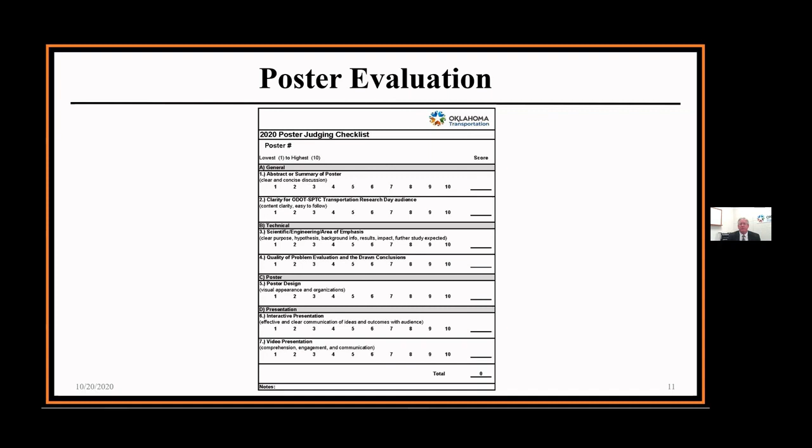Hard to see, I know it's a little small, but I wanted to provide the evaluation form that we use so everybody had a feel of the things we were looking for and what we did there. It helps the contestants, it helps the folks that prepared the posters, and maybe gives others just watching a sense of the things we were looking at and how we judged, to get to where we're going to give out a few awards here in just a bit.

So part of this is for knowledge, and when we have a chance to meet in person, I truly do not have enough time in the day to do what I would really personally like to do. I like to walk around and talk to everybody that puts something out there. There's so much knowledge to be gained and so many things to be learned, but we know there's just not enough time. But we also know we have a lot of good quality work going on in our midst, obviously at our state schools, but obviously our partner schools too. So we're obviously excited, as I said earlier, to have those folks join us.

But we have a competition, and we'd like to recognize those folks that were definitely exceptional. They were all great posters, but we came down to having the competition. So we're going to start with second honorable mention, which goes to the team from Missouri University of Science and Technology, for the repair of corroded steel bridge columns using ultra high performance concrete: an experimental study.

So what we want to do during this phase of the session is I'm going to pull up the videos, and we're going to look at the videos that were recognized by our competition committee.

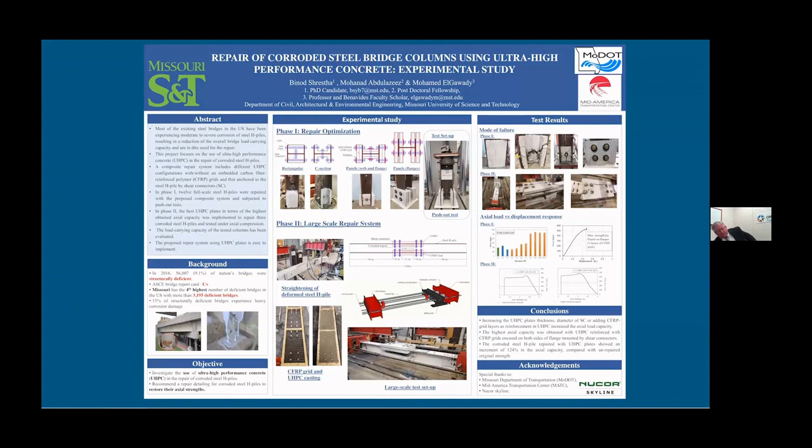So from this, we can recommend UHPC plates as one of the repair systems for corroded steel H-piles.

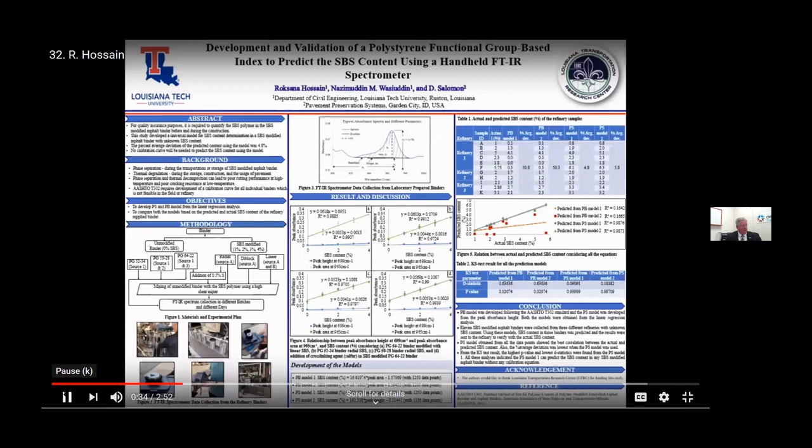AASHTO has a standard for SBS content determination in SBS modified asphalt binder and emulsion, but this standard requires building a calibration curve for each specific binder.

The goal of this study is to develop a polystyrene model using the peak height method at wave number 699, and to develop a polybutadiene model according to the AASHTO standard.

For this purpose, 3 different PG binders from three different sources were collected to mix with 3 different types of SBS polymer from 2 different sources. Sulfur was added in the SBS modified binder as a cross-linking agent.

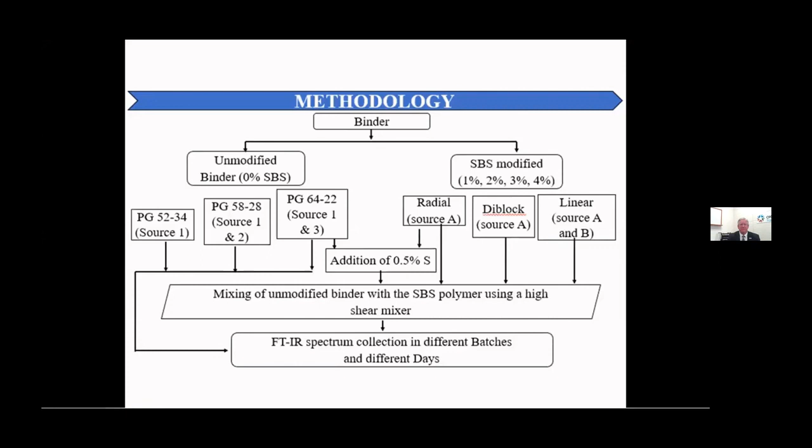SBS polymer was added to the binder in the laboratory using a high shear mixer. The height of the functional group was determined by drawing a baseline considering 2 lowest points on either side of the characteristic functional group.

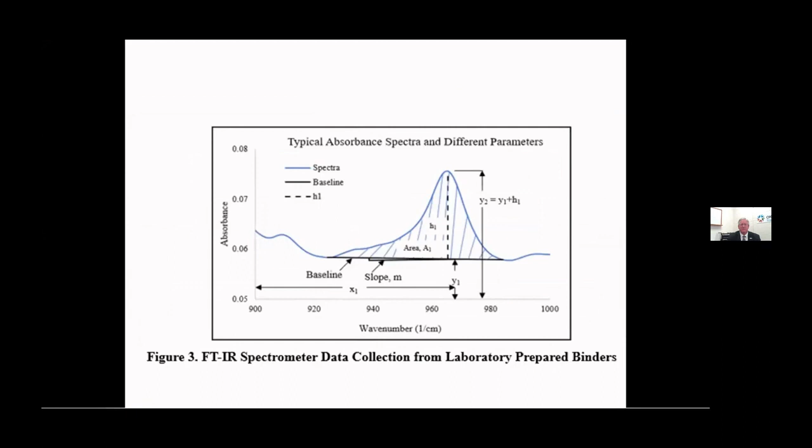After that, the midpoint of the baseline and the top point of the peak were used to determine the peak height. The absorbance area was calculated using the trapezoidal rule model. The baseline was drawn following a similar process as the peak height method.

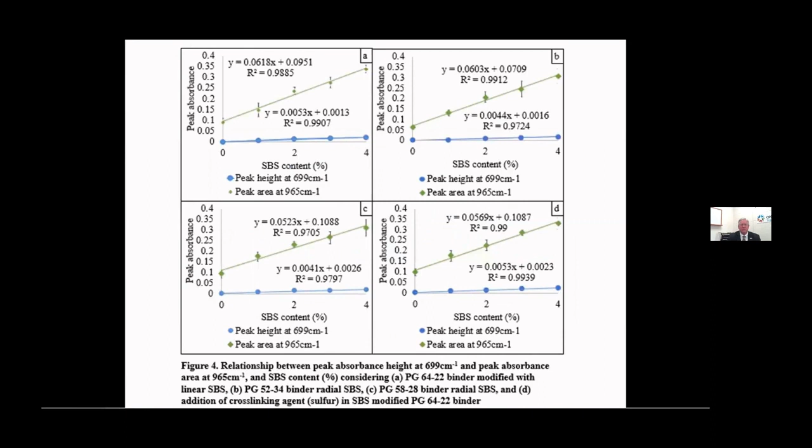It was observed that peak absorbance height and area are linearly correlated with the SBS content. From the linear regression analysis, 4 models were developed considering outlier data points. ANOVA was performed to check the models statistically.

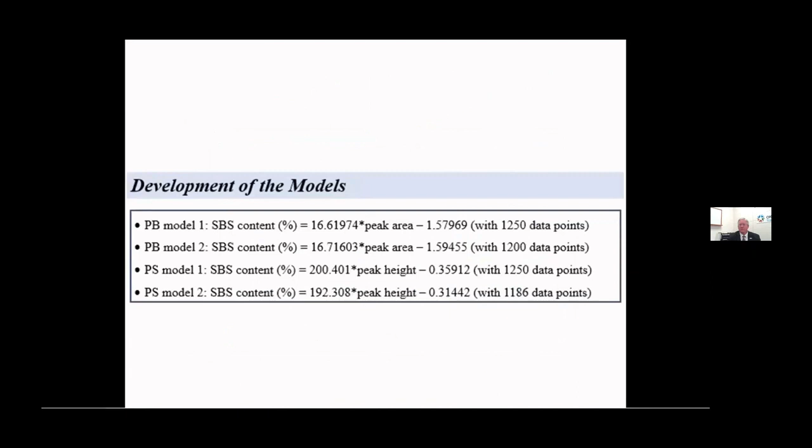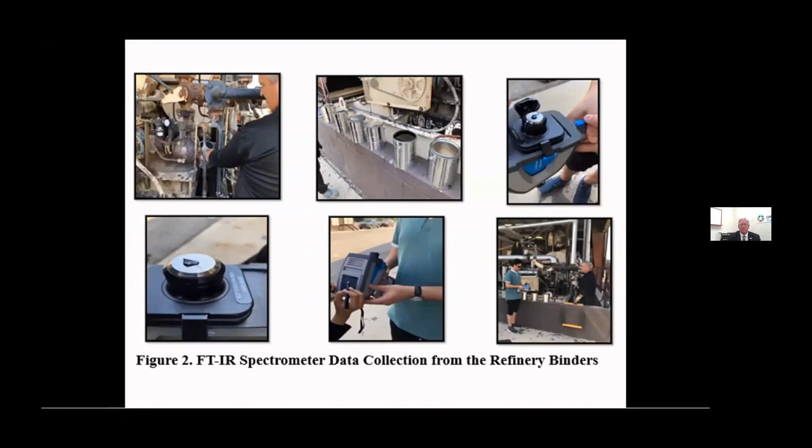To verify the models, 1 refinery was visited and 2 SBS modified binders were collected. Also, 9 SBS modified binders were supplied from 2 different refineries with unknown SBS content. Using the models, SBS content was predicted and verified with the refinery.

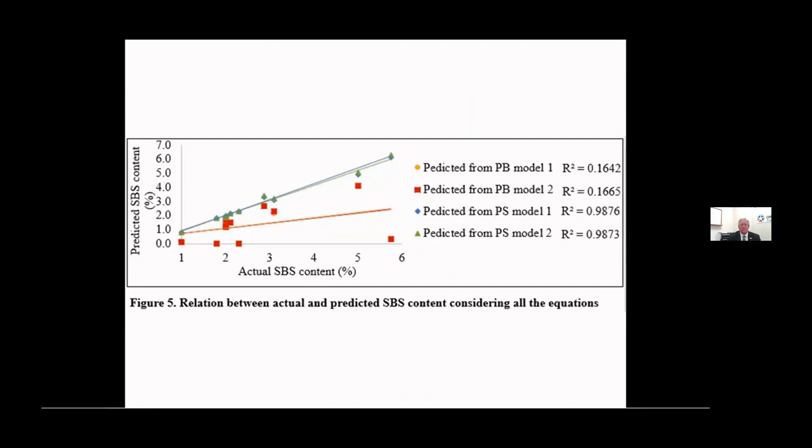It was found that predicted SBS content from the polystyrene model 1 has the highest correlation with the actual SBS content. From the KS test, the lowest d-value and highest p-value were obtained from the predicted result using polystyrene model 1. Finally, it can be concluded that the developed polystyrene model can be used to successfully predict SBS content without any calibration curve.

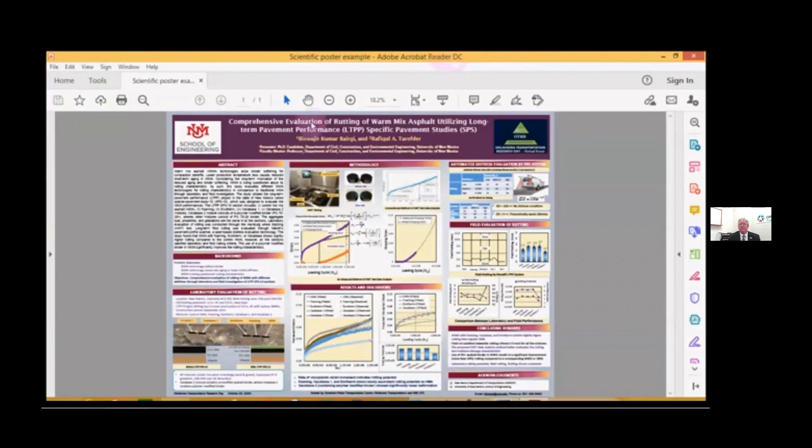Warm mix asphalt, we all know, is an asphalt technology that allows lower mixing and compaction temperatures compared to regular hot mix. It typically softens the binder, so the binder becomes less viscous or more workable, giving it higher workability. Due to the lower production temperatures, it has less initial aging and lower initial stiffness.

So the rutting performance of warm mix asphalt is a big concern for the warm mix asphalt technology, since rutting is directly related to the stiffness, the aging, and all the softening behavior of the mixtures.

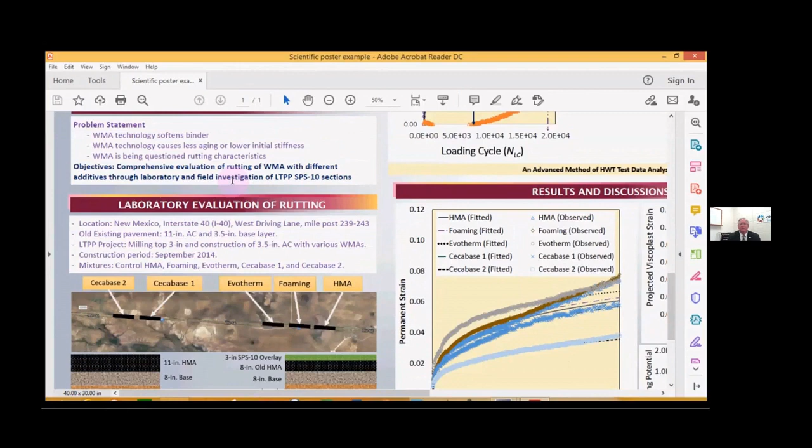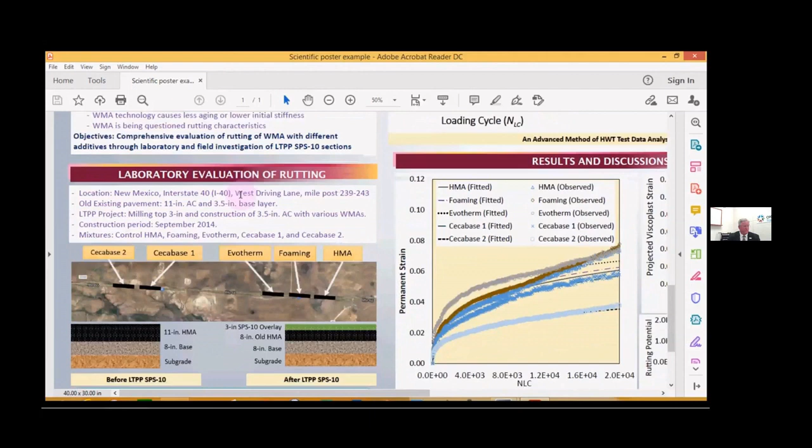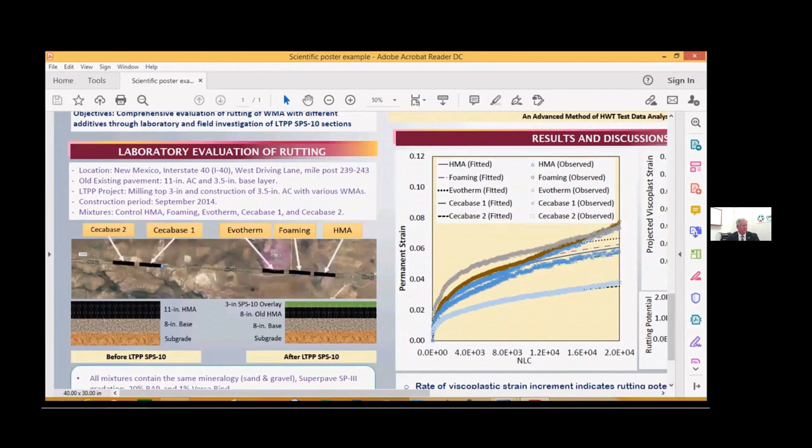Here I took the LTPP SPS-10 section, which is located on Interstate 40 in New Mexico, and this section has 5 different mixtures, including 4 WMA and 1 HMA for the comparison, and the 4 WMA include 1 foaming, 1 Evotherm, 1 Cecabase with polymer and 1 Cecabase with non-polymer binder.

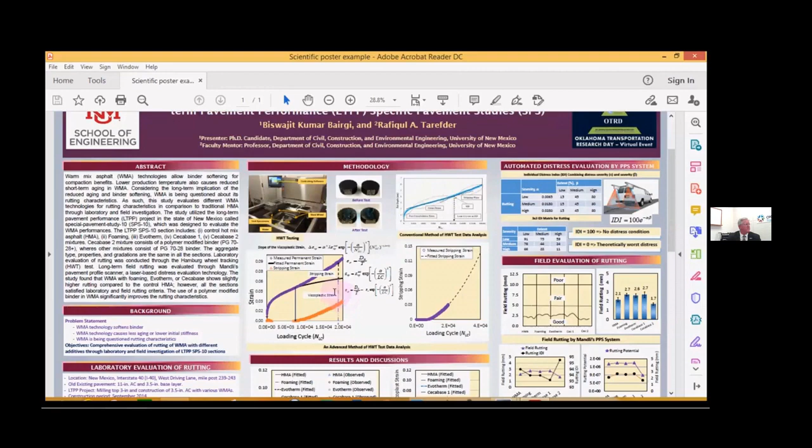The method includes lab and field investigation. In the lab, I conducted Hamburg wheel tracking test data analysis. I developed and used a very advanced method of Hamburg wheel tracking test data analysis for better evaluation of the rutting characteristics based on viscoplastic strain increment. And here I have analyzed all the strain, the viscoplastic strain increment and the rutting potential.

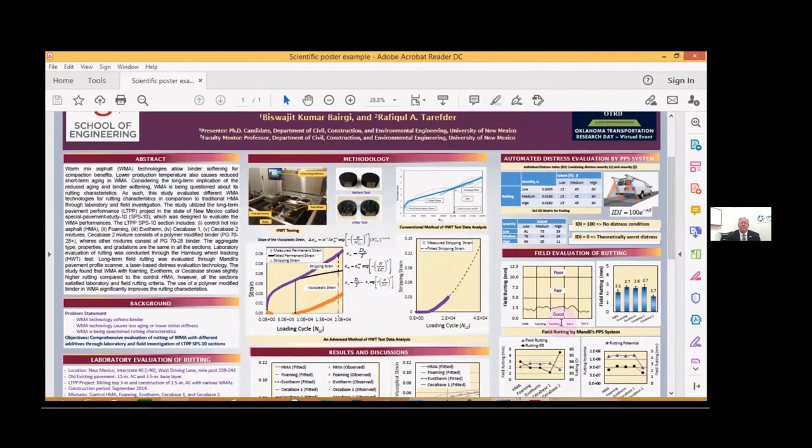And regarding the field investigation, I used a pavement profile scanner for evaluating the field measurements from the pavement, and I developed 1 parameter called individual distress index, which combines the extent and the severity of the sections for any particular damages or distresses. And I compared the lab rutting potential, field rut depth, and also the rutting distress indexes for better evaluation of the rutting behavior.

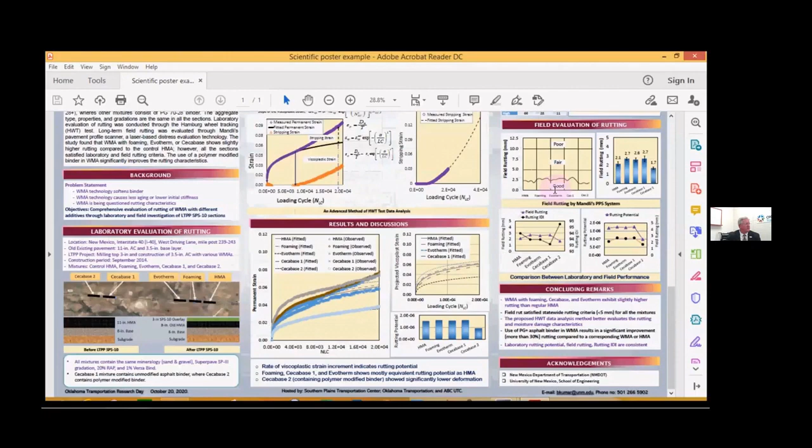And based on the analysis, I found several key findings regarding the rutting. Firstly, warm mix asphalt with foaming, Cecabase and Evotherm exhibits slightly higher rutting than regular HMA. And the field rut is mostly equivalent among all the warm mix and hot mix asphalt, and it shows less than 5 mm for all the sections. The proposed HWT test data analysis better evaluates the rutting and moisture damage characteristics.

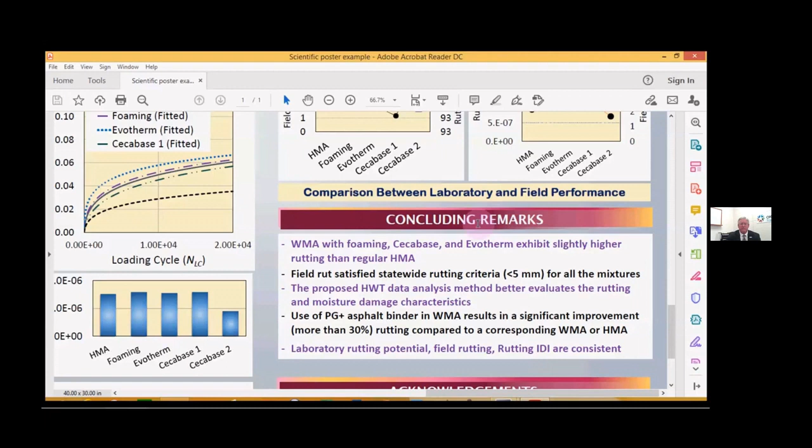And finally, the PG Plus binder, or the polymer modified binder used in warm mix asphalt, results in significant improvement in rutting characteristics. And that's all about the findings.

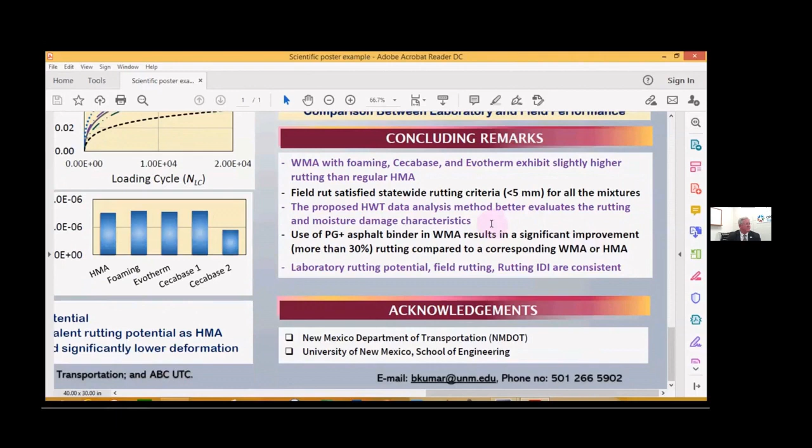Move on now to our second place winner from Oklahoma State. Research team and their project utilizing pavement friction data for the reduction of traffic crashes and delays.

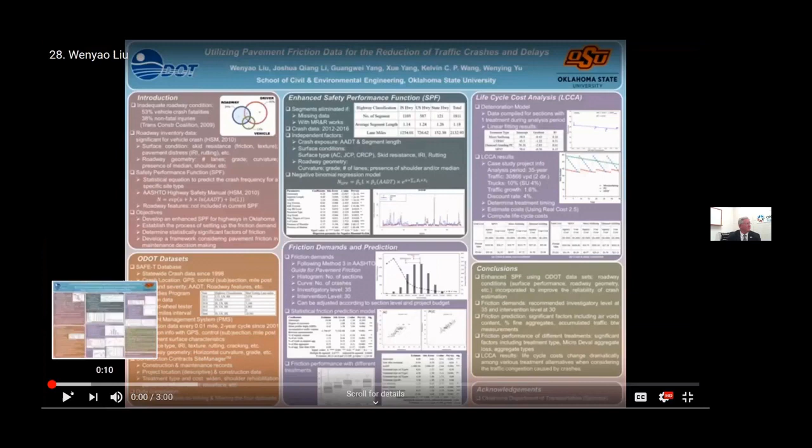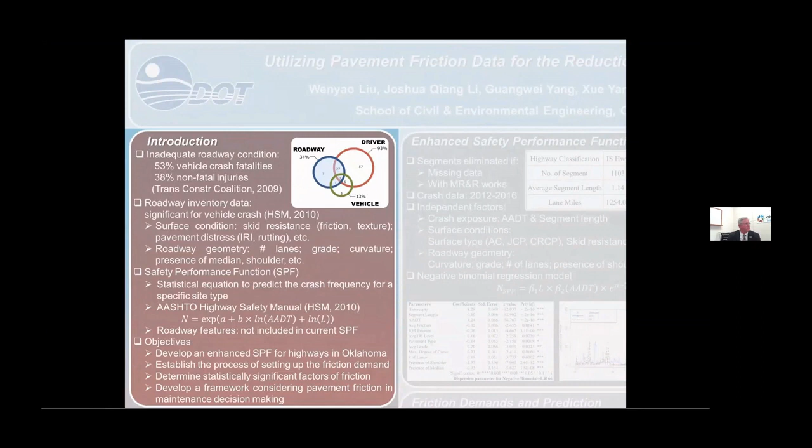Hello, ladies and gentlemen. I'm Wenyao Liu from OSU, the PhD student of Dr. Joshua Li. I'd like to introduce our study on utilizing pavement friction data for the reduction of traffic crashes and delays. Research showed that a large proportion of crash fatalities are related to inadequate roadway conditions. However, the safety performance function of the Highway Safety Manual has not included the roadway features yet. This study aims to develop enhanced SPF for highways in Oklahoma and then explore how the crashes can be decreased from the roadway conditions aspect.

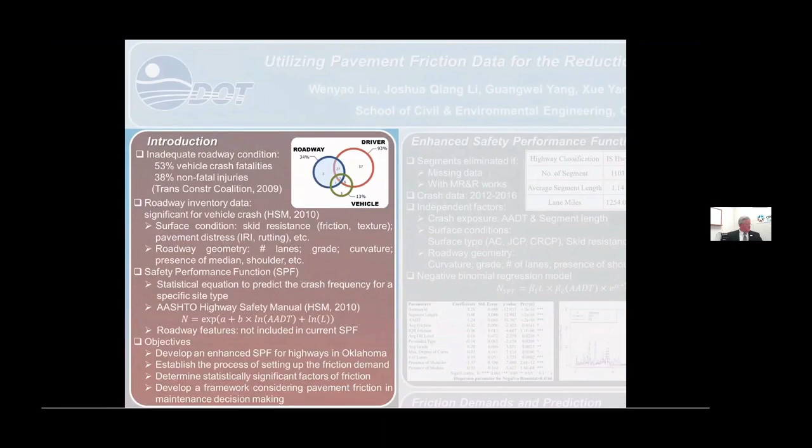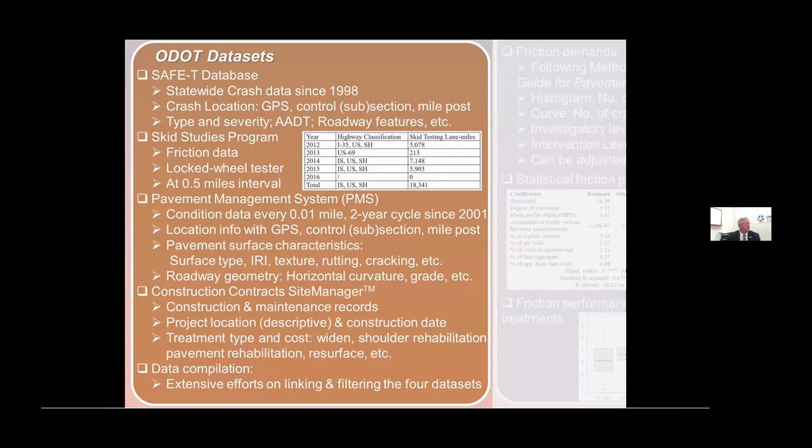4 datasets were provided by ODOT for this research. SAFE-T database with crash data, skid study program with friction data, PMS datasets with condition data, and SiteManager dataset with construction and maintenance records. The team spent extensive efforts on linking and filtering the 4 datasets due to the differences in the data format, especially the location and interval. About 1,800 segments were filtered out for building up an enhanced SPF.

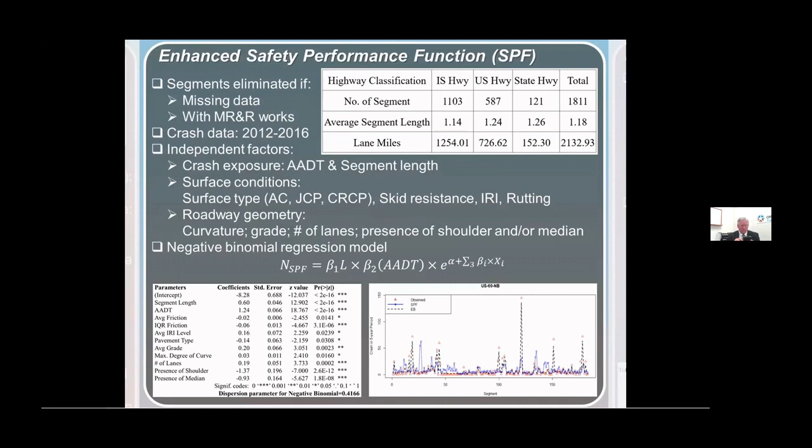The independent factors covered crash exposure, surface conditions, and geometry factors. Enhanced SPF based on a negative binomial model is built and validated with good prediction performance. The modeling results reveal that pavement friction has significant influences on the rate of crashes. The question comes to how to consider pavement friction in decision making. First, determine the demand. Following method 3 in the AASHTO guide for pavement friction, the investigatory level is recommended at 35, while the intervention level at 30.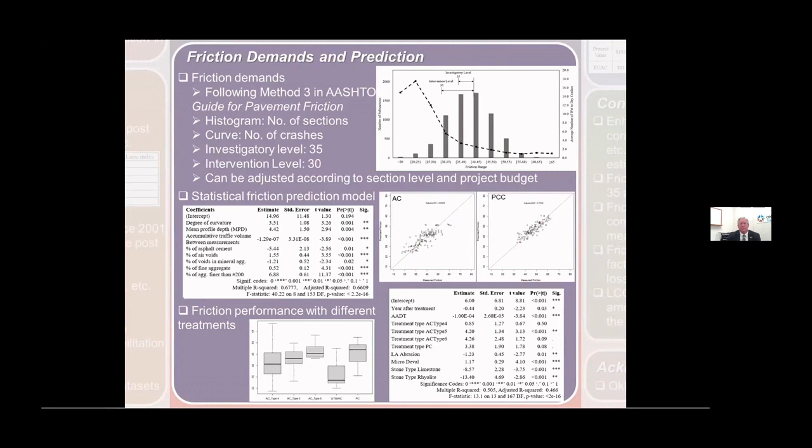Second, find the contributors. The results of the statistical friction prediction model indicate that the air voids content and the percentage of fine aggregates have significant effect on the pavement friction. Third, compare the friction performance of pavement after each kind of treatment. It is observed that different treatments result in different friction performance. The aggregate type and the Micro-Deval property of aggregate deserve more attention in pavement maintenance.

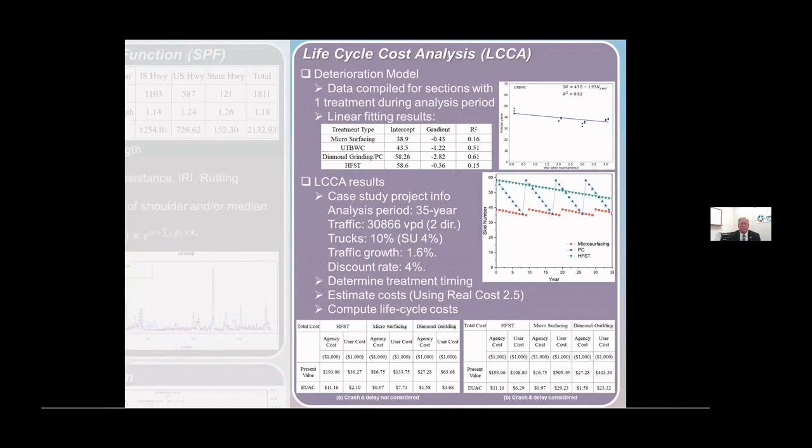Finally, it is of great interest to consider life cycle cost in decision making. By setting up the deterioration model for each treatment, 3 alternatives were compared in a virtual example project to maintain the friction level above the investigatory level. It is observed that the high friction surface treatment changes from the most expensive one to the cheapest one when considering the delays caused by crashes.

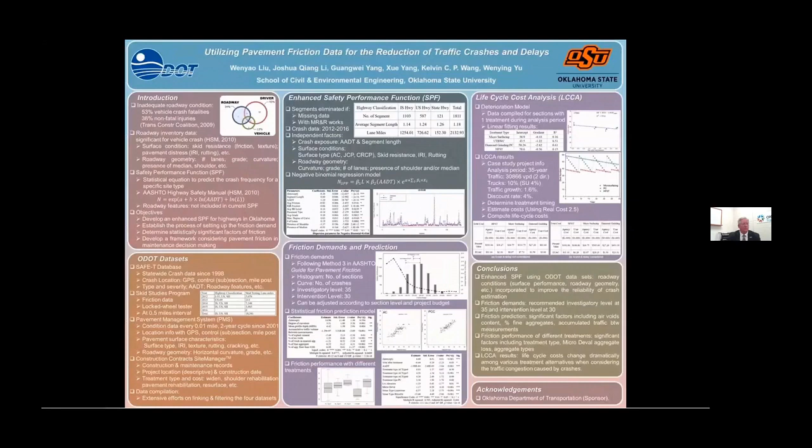And finally, our first place winner this year for our ODOT 2020 goes to another research team from Oklahoma State University, studying the project entitled Characterizing Behavior of Steel Axial Lap Connections with Bolts and Welds in Combination. Let's look at this final video.

Hey, my name is Caleb Bennett, and today I'm going to be showing you my research at Oklahoma State University. Let's go.

Once again, my name is Caleb Bennett, and I'm a master's student and graduate research assistant here at Oklahoma State University for Dr. Simon. My research consists of monotonic loading of single shear axial lap connections and fatigue testing of double shear axial lap connections.

In the previous months, we've done testing, monotonic testing, on single shear specimens in the frame that you see behind me right now. Currently, we're testing fatigue on double shear connections, which is what you see in the frame behind me right now. In this video, I'm going to take you through the specimens, some of the results we have from single shear testing, and some conclusions that we have that are beneficial to the bridge industry.

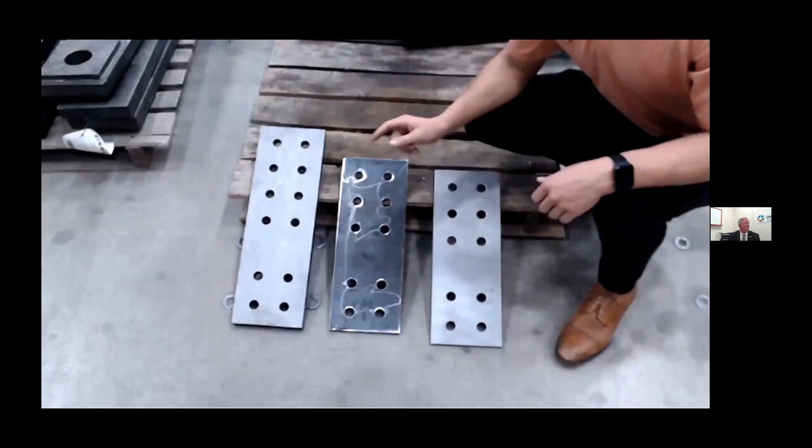Once again, if you're not familiar with our connections, the difference here is that we call them combination connections. That means the connection employs bolts and welds together to share the load. Next, we're going to take a look at the specimens. First off, we have the single shear specimen sitting right here. It's a Class B specimen. The upper portion is only for the grip. The lower portion is the portion we're actually testing and recording data. We've completed 12 tests on this single shear as of today.

Next, we have the fatigue specimen. This is a Class A fatigue specimen. We're going to run 6 tests under fatigue loading on this specimen here. We're going to have a 2x2 and a 2x2 on the upper and the lower with the same size weld, so we mirror the connection on both sides. That way, whenever a failure occurs, we know that it's going to be the same 2x2 connection with the same bolt to weld ratio. And then here, we're going to do the same process, but with a Class B splice plate. Now let's get to the fun part, the actual testing.

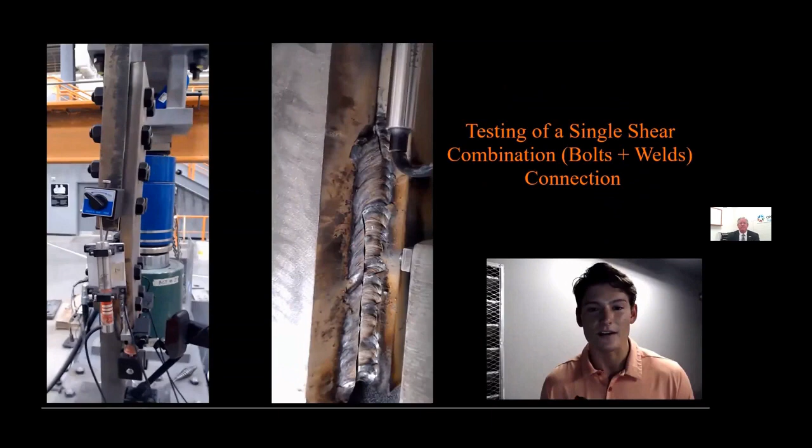So, what you're watching now in these 2 videos is a view of a single shear combination test. That's a test with bolts and welds. As the test is running, you can see that the plate starts to bend and that the weld eventually fractures, which causes the failure of our connection. This video is sped up. The actual test took 45 minutes, but this stuff is so cool.

These single shear tests were great. They show that the combination connection does possess a higher ductility, capacity, and stiffness in comparison to the bolted and welded only tests. Now, what's left? We're testing fatigue. This fatigue is going to be great. We're going to try to categorize the combination connection on the SN curve to make everything easier for bridge designers in the future and keep the public safe.